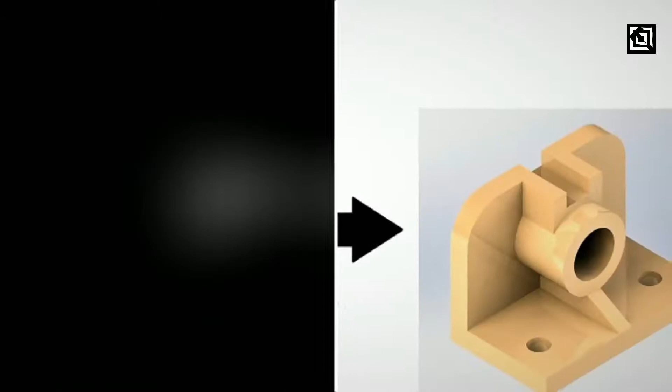Here we have the 2D geometry of the 3D part model that we are going to draw today in SolidWorks 2015, and we are going to complete this whole part model in 7 steps today. The first step will be the extrude of the L section that we have here in the right plane, and we are going to extrude with respect to the mid plane to an overall length of 126 mm. The second step will be followed by the extrude of the concentric circles that we have here.

The third step, we will also be giving the fillet of R25 on both sides. The next step will be the rib that we have here. Today we are giving a new feature called rib that we'll be using to do this part, and we will continue with the hole at both sides, and then extrude the rectangular section that we have here and extrude cut of this section that we have here.

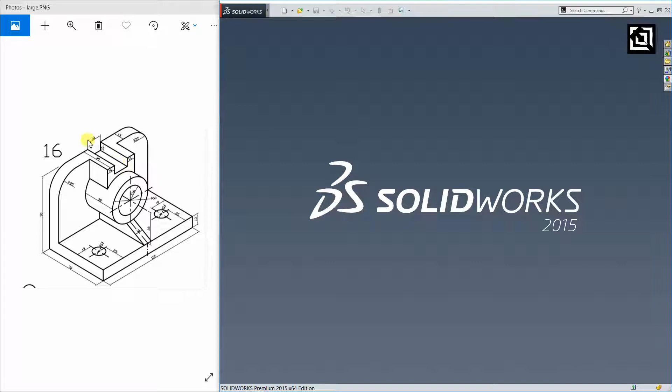Let's start our SolidWorks 2015 with a new part model. Since it is in the right plane, I'm taking the right plane as normal, and I'm taking this edge, the corner, the end point as the normal, and from there I'm going to draw an L section. After completing this, I will give the dimensions as required. The overall length is given as 90, and the width is given as 13 mm.

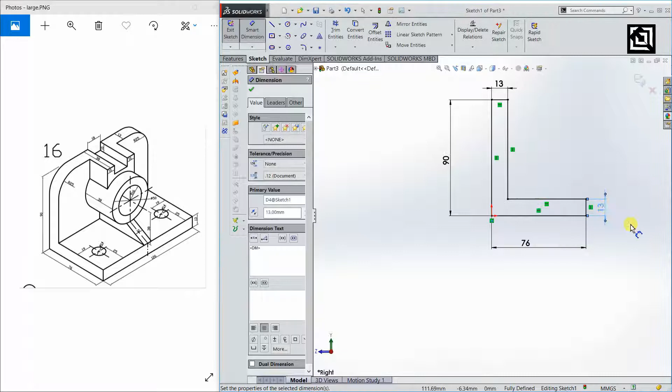This length they have given as 76, and the width they have given as 13 mm, and again the same width they have given as 13 mm. Yes, we are done with the geometry now. Just giving the extrude. Don't forget to give the mid plane section since it is symmetric about the right plane now, and the overall length they have given us 126. We are giving 126 as given.

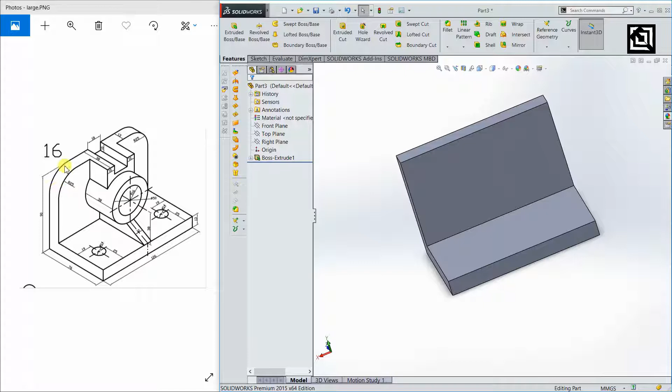Yes, we are done with the first part, and the second part we will go with the fillet section that we have here. So just giving the fillet option, this edge and this edge, changing from 10 to 25.

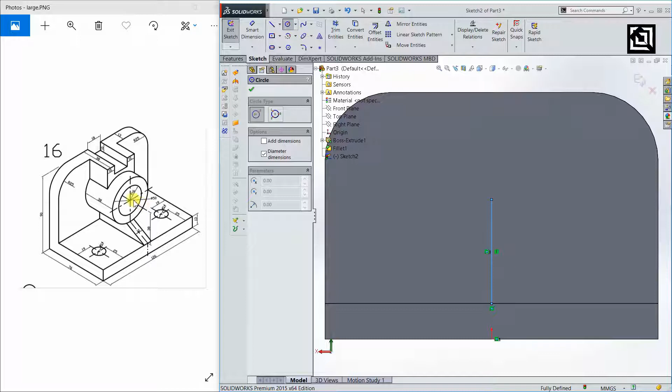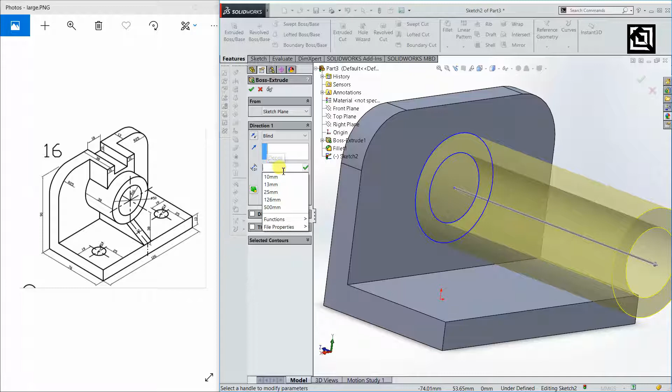We'll continue with the concentric circle extrude that we have here, made at 38 mm from this plane, I mean the edge that we have here. So I'm drawing a line from the midpoint of the line towards upward to a length of 38 mm, and from there I'm drawing two concentric circles of radius 16 and diameter 50 - radius 16 meaning it's supposed to be 32, and the outer circle is supposed to be 50. Yes, we are done with the geometry now. Just giving extrude to a length of 38 mm as mentioned. We are done with the extrude part here, and we are continuing with the rib part that we are having here.

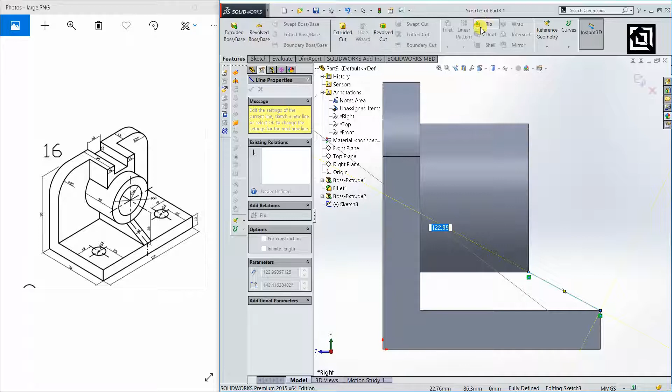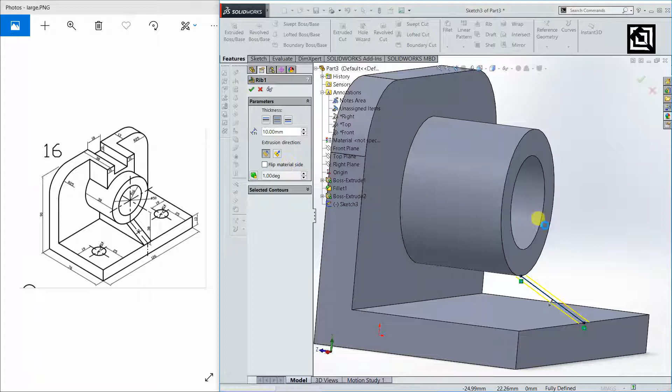I'm taking the right plane as normal, and we are going to give a line that connects the edge that we have at the bottom of the concentric circle and the lower part. And yes, I'm giving the rib section. Make sure the direction that we have here is towards the direction that we need, which is downward, and it's supposed to be this one, because since it is symmetrical now, it's supposed to be on both sides. The overall width they have given us 10 mm. Yeah, it's made as we required.

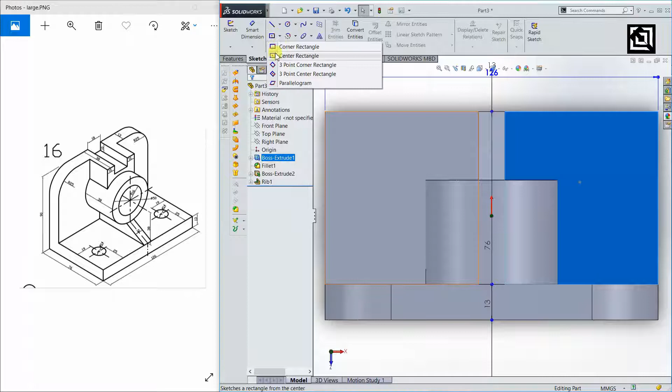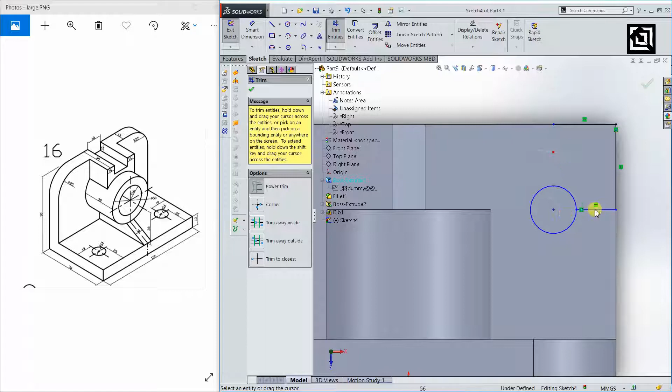The next step will be the extrude cut part of the hole section that we have here. It is made from this point. If we draw a rectangle of 19 by 25, we'll be reaching the center point here. So I'm drawing a corner rectangle now from this end to a height of 25 and a width of 19 mm, and again from here to a height of 25 mm by 19 mm, and drawing two circles of diameter 14 mm on both sides. Just trimming off the unwanted parts. Yeah, we are done with the geometry now. Just giving the extrude cut. Since it's made until the outer side, it's okay, we'll just give the tick mark.

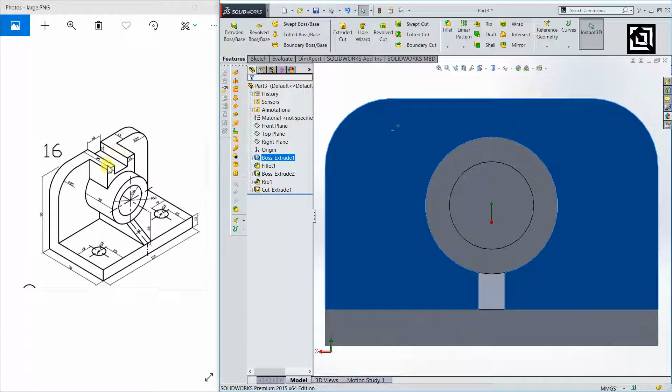The next step will be having an extrude of the rectangular shape that we have here to a length of 38 mm from that edge. So what I'm going to do is, either we can draw that rectangular shape from here to 38 mm, or you can draw that section from this plane and subtract 13 from 38. I'm doing the second method now. I'm taking this plane as normal. So the overall length is 10 plus 10 plus 18, so it's supposed to be 38. If you are drawing from the midsection, it's supposed to be 19 on either side.

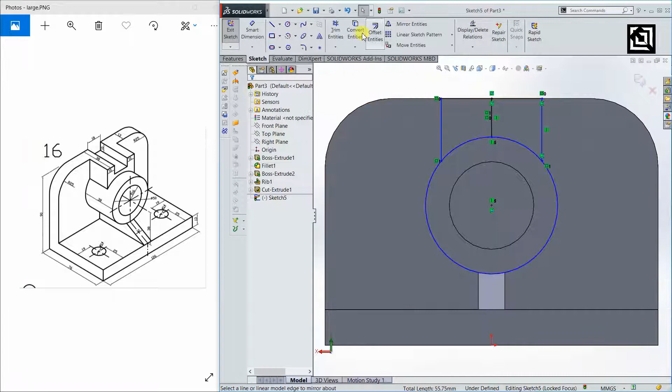And I'm connecting the outer circle now, and I'm drawing the circle to make the cross section, completing either half of the closed section. With respect to the center, I'm giving the mirror as usual, trimming off the unwanted section. Now we have the closed contour, giving the extrude option to a length of 38 minus 13, which is 25.

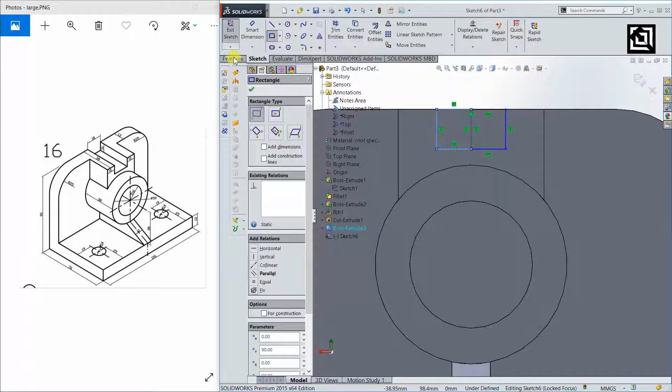The final part is to extrude cut the section that we have here, which is 18 by 10. So again the same will be repeated. Starting from here, it's supposed to be 10 by 9, again 10 by 9, trimming off the midsection, extrude cut up to the surface, and here.

Hope we have completed every part that we have for today, and yes, we are done. Hope you all enjoyed this video, this tutorial.